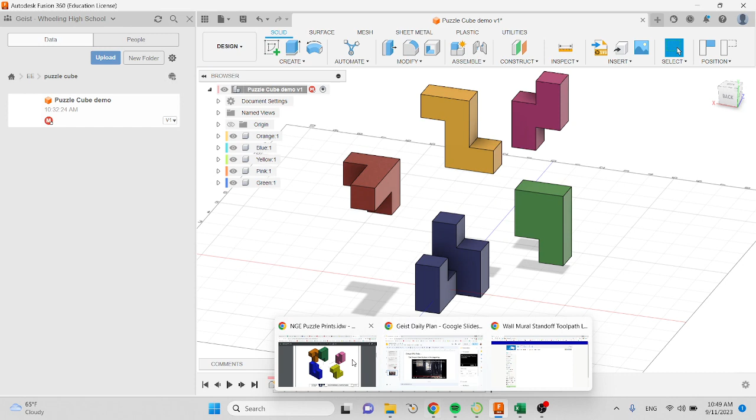When I'm looking at my print, my solution, I'm going to pick one of my cubes as a foundation or base that I'll build everything off of. For me, I'm going to pick the blue one. This blue one is almost like my grounded part, the one I want to start and attach everything to.

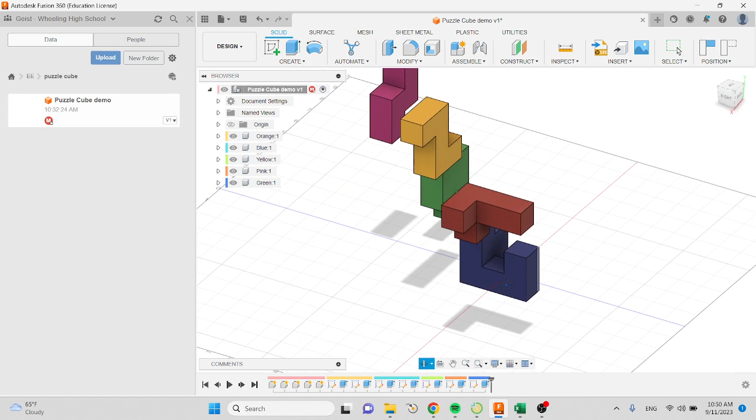So I'm going to look at it, positioned in space like I see it right now. But if I look at Fusion, this one is not positioned in space like I saw here. So I'm going to rotate my world by holding the shift key, spin my world, and move everything else out of the way so I don't get confused. I'm going to rotate my camera so I see the same angle of my blue piece in my drawing as I do here in Fusion. Now everything is kind of the same angle, and you can see that right there.

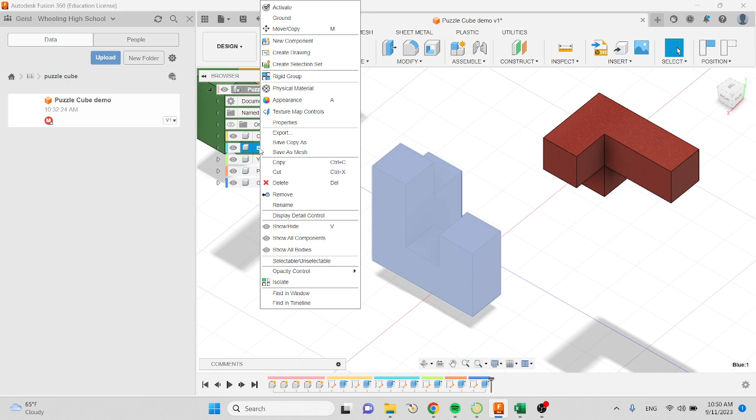However, this is still able to kind of move around and float, and that's not good. So I'm going to go over to my blue in my browser, right click, and ground it. Anytime you see this window come up that says capture or revert, you will always click on capture. Now, since I've grounded it, you'll see a little thumbtack on the blue part. You'll also notice that I can't move it anymore, but the other ones I can move.

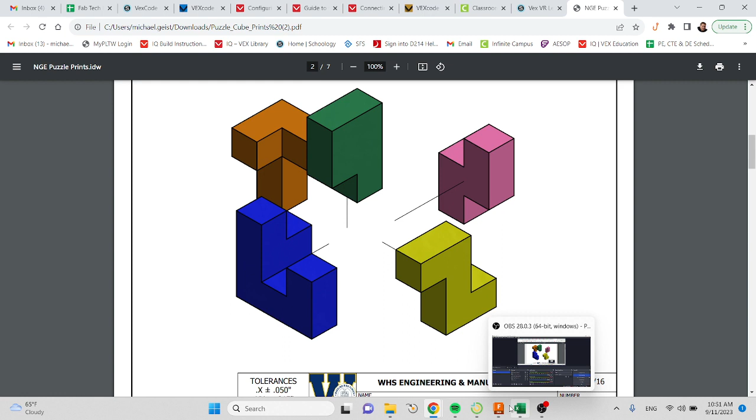I'm going to zoom out a little bit. Now I'm going to pick which part I'd like to assemble first. I can pick green, pink, yellow, orange, it doesn't matter, but I think I'll pick green first since it seems to be looking at me. I'm going to bring it on over, and you'll notice if I zoom in, the green one kind of sticks in the middle here. If you're not sure, you can always go back to the original print and see where it fits in the middle.

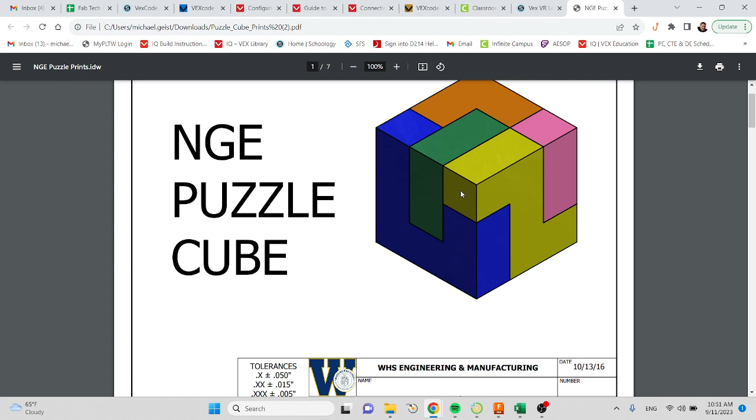This exploded view will show you where it fits. So in order to get it to stay locked into where it needs to be, I'm going to move the other ones out of the way so I don't get confused. Here's what I'm going to do: I'm going to go up to the Assemble menu and click on Joint.

You'll notice that my grounded part has now just turned into a ghost. My joint window appears, and if I go to Motion, there are 2 windows: the type of joint, and then how I select the joint. The type of joint is going to be rigid because I don't want it to move. For my position, I'm going to pick 2 different faces.

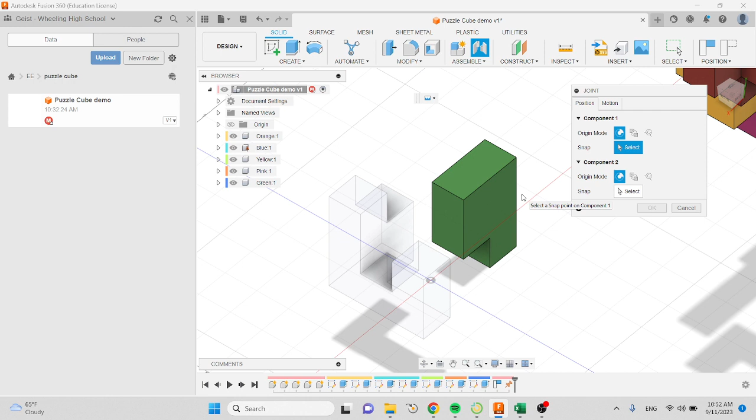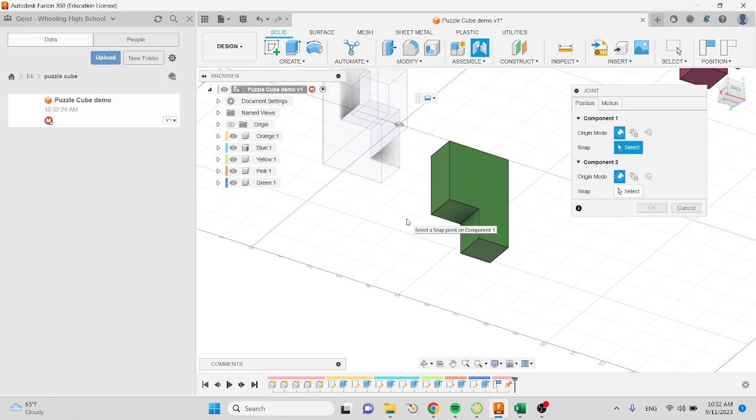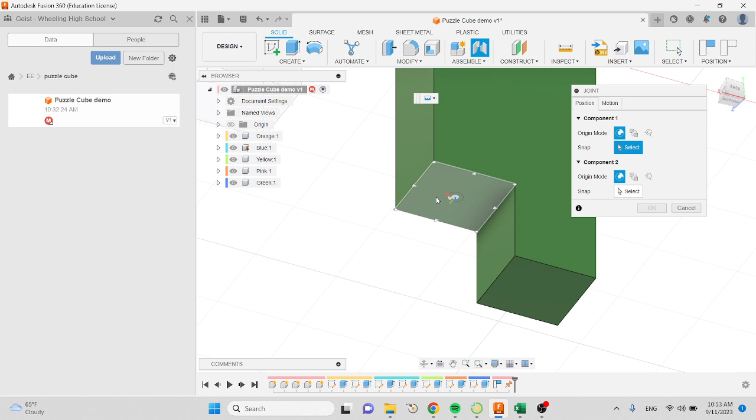So you're going to have to use your mouse, middle button, and shift, and rotate underneath, hovering your mouse over a face—I have not clicked yet. Here's the face. This face is going to eventually, listen carefully, touch this other face. So before I click, I also want to make sure that I pick a point on this face. You'll notice it's giving me the option of a bunch of different points, so I'm going to make sure I pick the middle of this face.

Click. Now I'm going to zoom out, rotate, and go over to where I want to place it. Notice how it's giving me the option as I hover my mouse for a lot of different faces. But this is the face that the other face should essentially be kissing—think of two faces kissing each other. This is the other face that the first one was supposed to kiss.

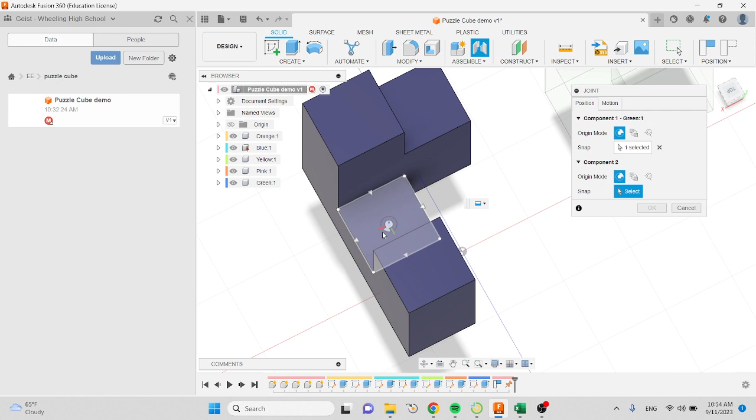This point and that other point are the two that should be locking together. If I were to pick that point, they wouldn't line up, but this point, it will. So I'm going to click here, and now you'll see that they line up. I'm going to click OK.

It doesn't move. If I left click and grab it, it doesn't move. This little symbol here, if I click it, it highlights—that's your rigid connection. I'm going to zoom out. If that didn't work or it went to the wrong place, click undo and try that again.

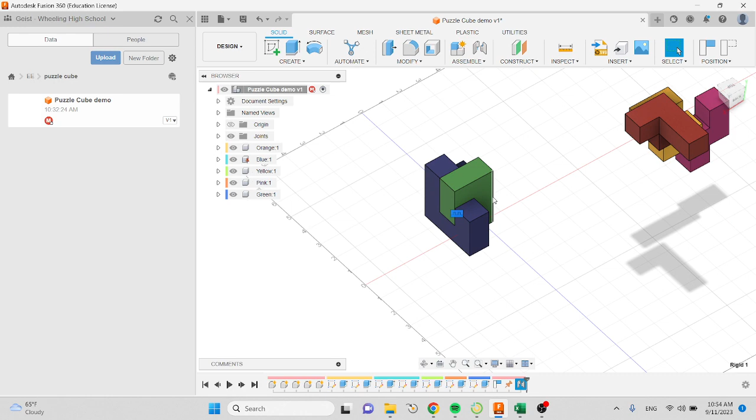Let's try another one. I'm going to bring in yellow. Where's yellow? It's like my yellow is a little more orange looking, but that's okay. So yellow kind of does this, sits right up and over. You can notice because I'm looking at a two-dimensional screen, it's hard to tell how deep something is, but that's okay.

So for this one, I am going to be creating a rigid joint between this surface and this surface. Let me show you again - this surface and this surface, the one I have highlighted.

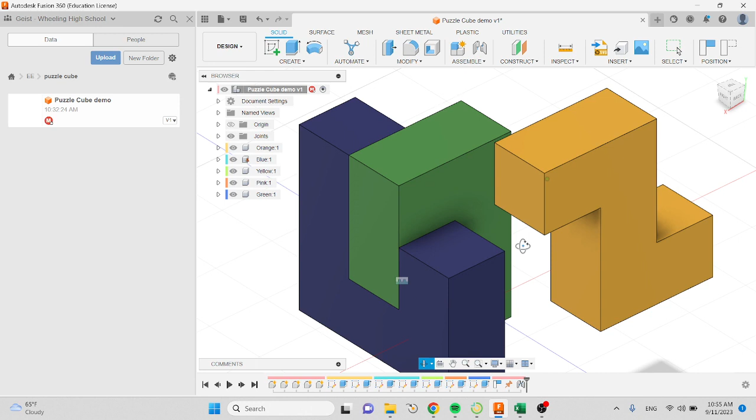So to do that, I'm going to click on Joint. Notice how my grounded part disappears. So I'm going to have to hold Shift and press my middle mouse button, and I'm going to highlight the surface and make sure I'm picking that middle grip point, because that's a good one to grab it by.

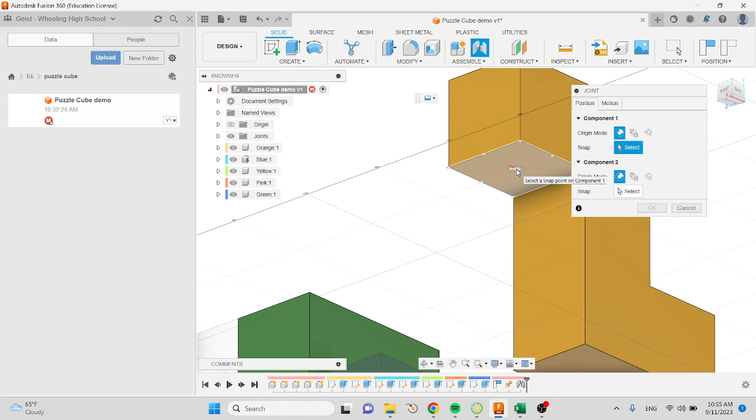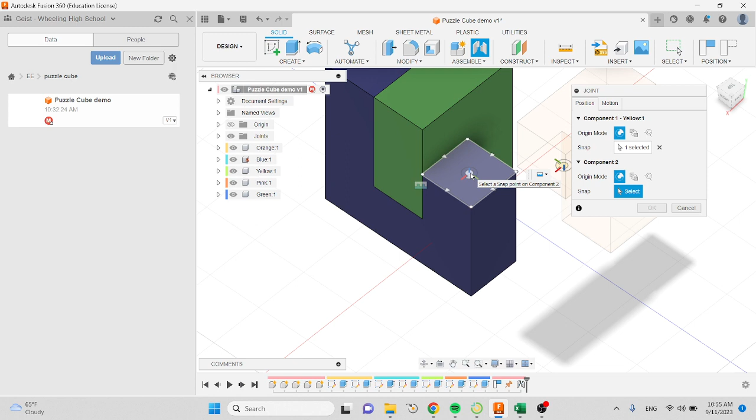Click. And then I'm going to roll out on my middle mouse button, and then I'm going to press Shift, and press the rolling mouse button again, and spin it. And then I'm going to hover over this surface, make sure the middle button selects, and click.

Now, before I hit OK, in the future if you wanted to rotate or move it off of that point you clicked, you could do that. But I don't - this is exactly where I want it. So I'm going to click OK.

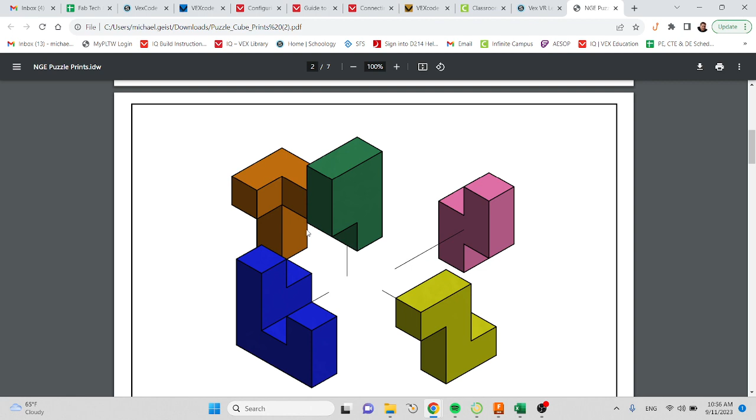So it does not move. Let's go back to our drawing and look at the next one. So we have this little orange piece, which fits in the back side. If you look at the assembly, you'll see it fits in the back just like that.

So I'm going to grab it. Now you might look at this orange one and think it's not even in the right direction for it to fit there. So it needs to be flipped up and placed at the same time. But you can accomplish that by using the constraints - let me show you.

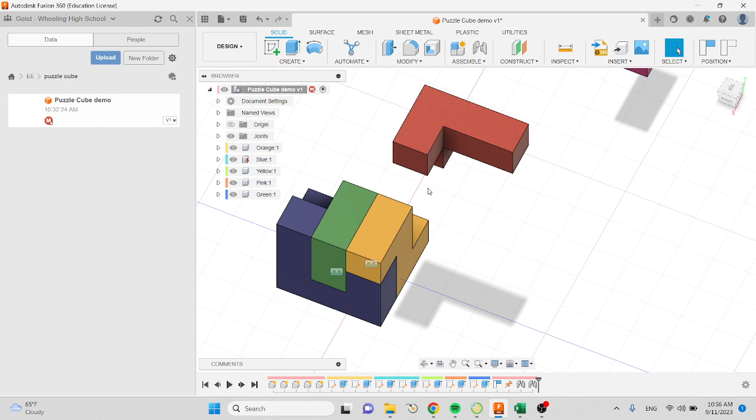So for this one, I'm going to create a joint. Now for this guy, you'll notice it's this surface here, and that point that needs to be stuck to that surface. And then you're going to look at that and say, that's wrong.

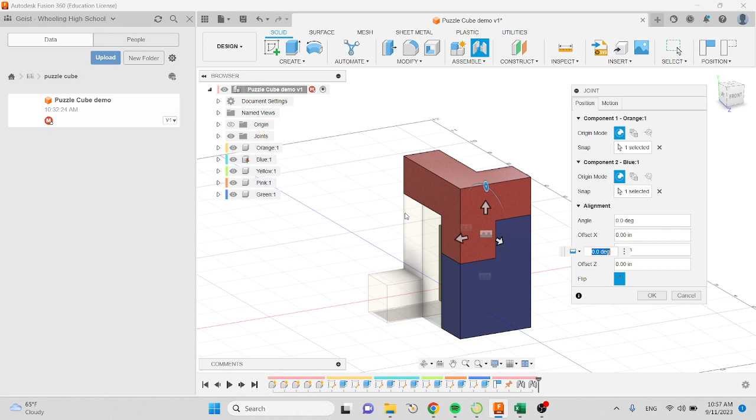But if I rotate it this way, just like that - that did not work. Okay, so here's another solution that you can do.

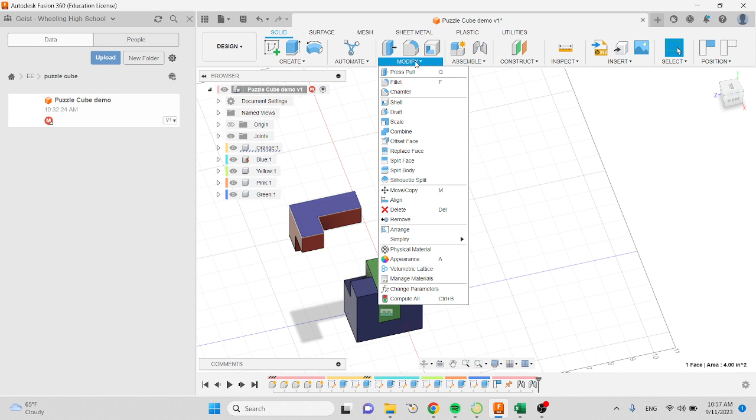You can highlight a part and go to Modify. You can move it, and you're going to get all of these different rotation arrows. So if you're having trouble like I am, what you can do is kind of rotate that object.

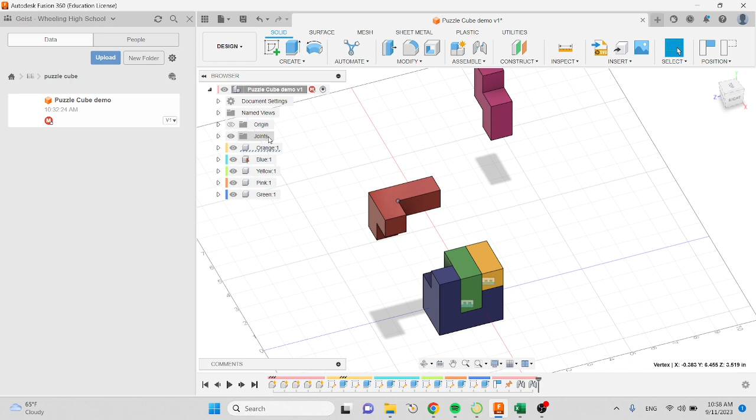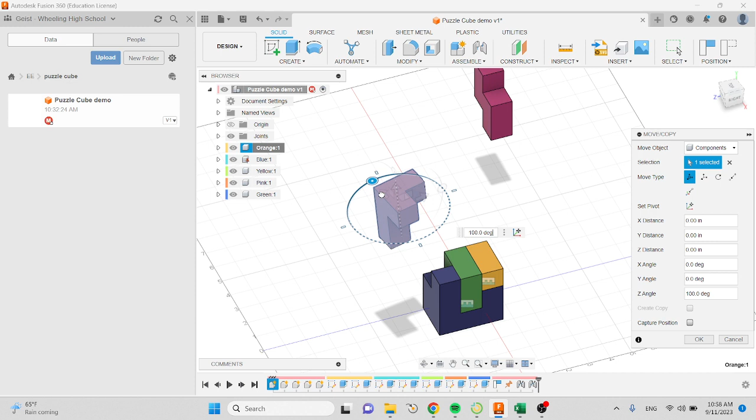Let me do that one more time. Pick the object, right-click on it from the browser, go to Move/Copy, and just drag it like that. There we go. This is just going to help you spin it around so it's close to the orientation you need it in your model. Now this again is not creating a joint - all it's doing is getting it orientated in the right spot.

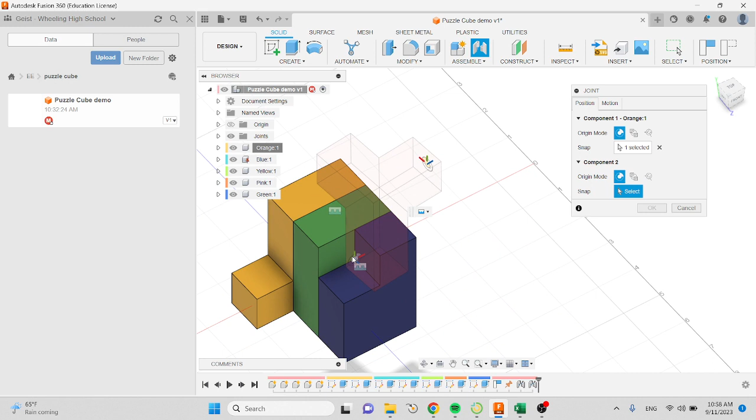There we go, now let's try it. Assemble, joint, that surface, that point, spin it around, that surface, that point. Perfect.

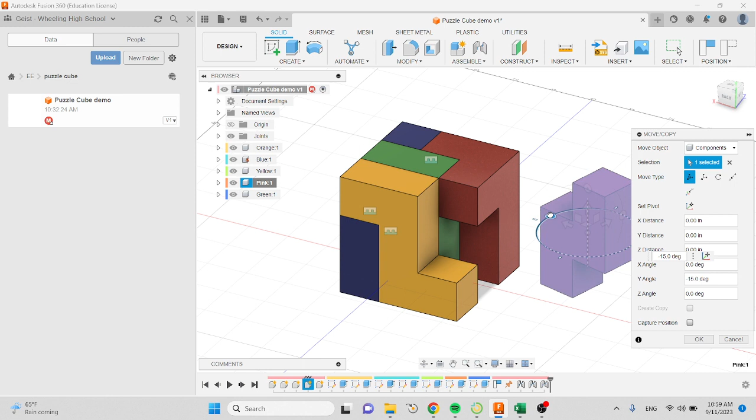All right, now our last piece should, if everything's right, fit right into there. I'm going to do that same method. Before I create the joint, I'm going to right-click on pink, and move copy, and rotate that just to get it in the direction I need it, before I create a joint.

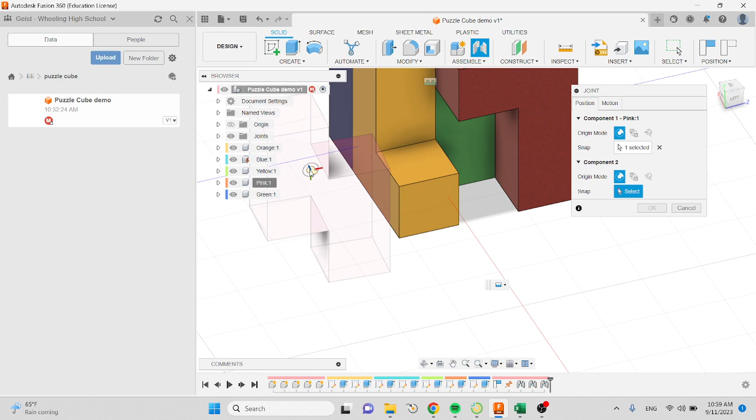And I pick that surface. So you'll notice what I just did - I picked that surface and that point, but there isn't... oh, there is a surface. There we go, that point. I was able to find a surface and a point that matched.

Okay, there you go. Again, any mistakes, click undo. But when you're done, you should have all parts or components locked so that they don't move. Click save.

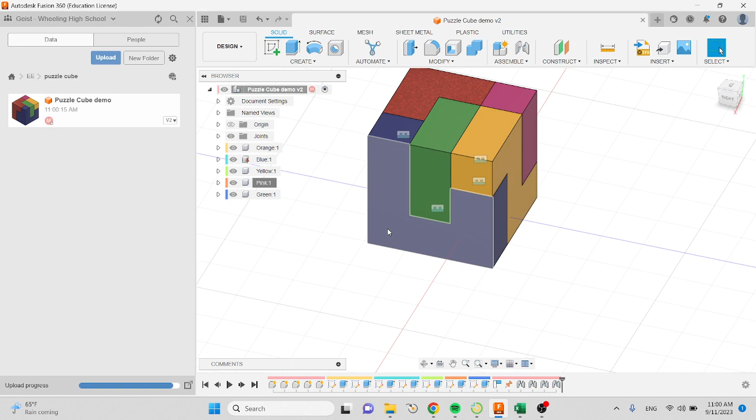And then you're going to submit your public link. In order to submit a public link to the assignment, as long as it's saved, go up to the file, click on share link, and turn on this little checkbox. Once you do that, this web address is going to appear and you're going to copy it. Then you're going to paste that into the Schoology assignment and upload that link. That gives me the ability to see your assembled cube and your finished progress.